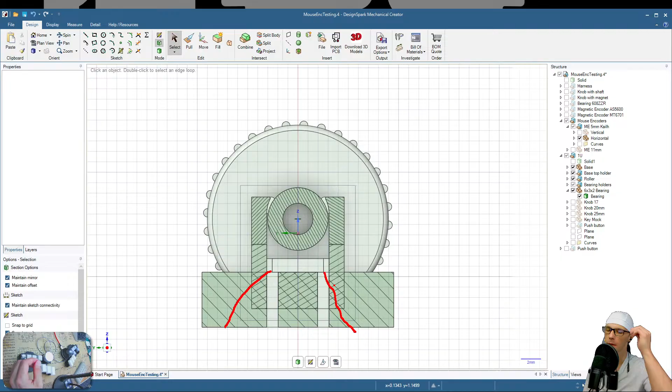The issue was that it was a little bit difficult to push the wire through, and after the stream I was thinking about that, and decided - what is the point of having it like that? Wouldn't it be just better if we just go straight down from the switch without any canals, without any fancy angles that will make moving the wire difficult?

So I just did that. I removed those canals that we did on the stream, and I just put these two. So as you can see, it's straight down, and our push button sits exactly over here. I can show you later on the workbench that it sits perfectly - we can just attach the wire and it will go straight down. Absolutely perfect.

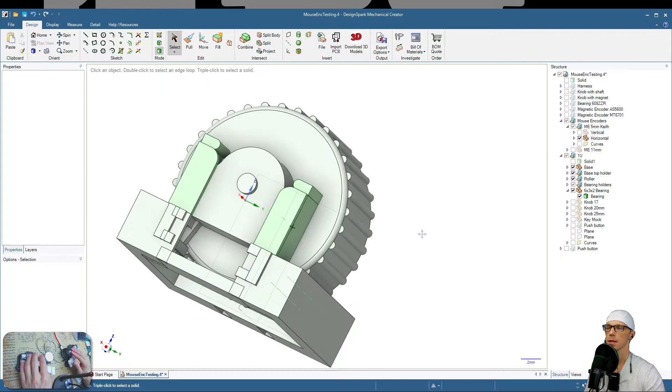Another thing that I did - I was thinking about this side. I noticed that there was maybe, let me first remove this so you'll be able to see. Okay, so original design from our previous stream was something like this. There was nothing to limit the movement over here.

It wasn't that much of an issue actually, but I noticed that it's kind of easy to move it up and down. Even by accident, you can just touch the wheel up or something, and it might happen you will just pull it out.

So at first I tried doing something - okay, I think I already removed this part. But I did like a harness over here, something like this, with an opening for this shaft, because this is where the shaft comes from the encoder, since we are using it in reverse. So I was hoping that this would hold it, and it wasn't that great. I didn't quite like it, and it was causing the whole thing to be just a little bit crooked.

So I scrapped that, and I went back to something that we had designed previously, but at a smaller scale. Don't bother with the size of the encoder, it's not fully up to scale, but you can trust me that it fits. I can show you in a second.

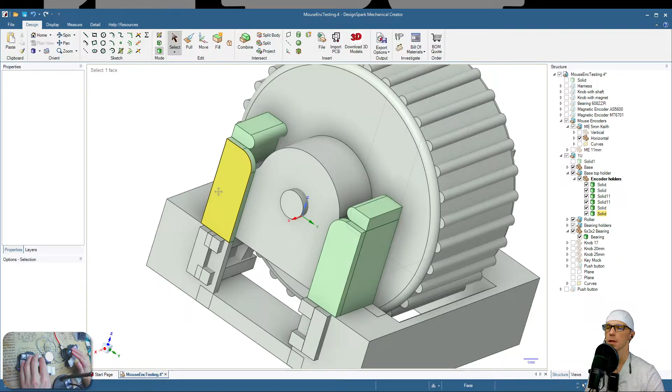So I have this to hold it, and it's pretty okay, pretty good. On top of that, I had to do some more tweaking with the wheel to have it perfectly in the center and to not scratch any part of the harness, or the mount for the scroll wheel. So yeah, I did just that.

So this is what we have now. As you can see, we have these tiny holders over here, and they hold quite okay. It's kind of difficult to pull it out, but at the same time, it's not that difficult to push it in. So that is okay.

I noticed that if there is an issue while mounting it, the only thing you need to do is move the bearing a little to the left or to the right on the metal pin, and then everything is fine. So yeah, we have a nice scroll - nothing is scratching, it's moving quite easily, and on top of that, we have our push button.

Yeah, we have a nice click. I wish the button was a little softer, but looks like we don't really have much choice here. I was hoping I would be able to use a mouse push button, but sadly it's the same shape as this one. It is softer indeed, but it's the same shape, and we can't have that - it's taking too much space. So we have to go with this. I guess it will be fine. Shouldn't be an issue.

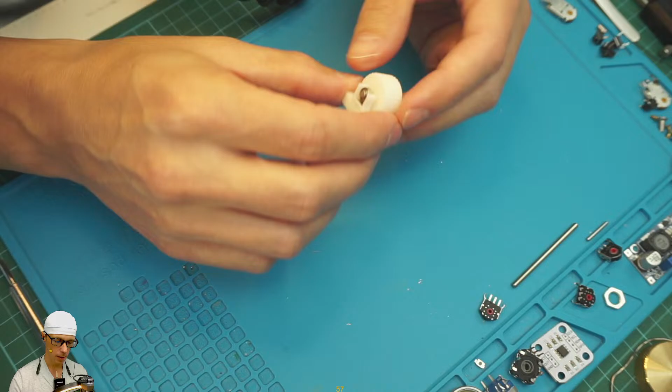It's not that we can't press it - it's quite okay, very tactile, needs some more force. Taking into account all those things, I think we're done with it. I don't think we need to tweak anything else on the encoder or the whole scroll wheel anymore. It seems fine, it's not loose anywhere, it holds pretty firmly. So I think that will be it.

So today, what we need to do is check how it fits with some other parts of my keyboards. So over here, we have our experimental Chordie. I think we can reuse this part and try to fit it in and see how it works. I also have one more keyboard prototype that's like 30% done. I'll be working on it, but far into the future after we finish Chordie - looking at the speed of progress we're having, that might be next year.

Anyway, I'd like to take a look how it behaves once it's put in a key plate, like when you have it next to some other keys. So we'll design a part of the top plate for my other keyboard. I have two of these over there.

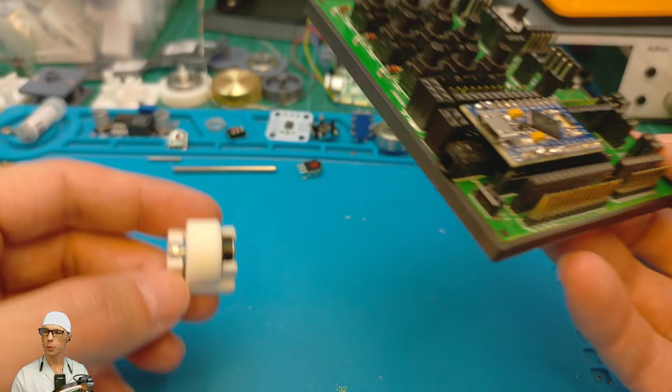Also, I hope we'll have time - maybe once we're done with CAD, we send something to print. What we can do is use our prototyping board, one of these. We already have firmware for a simple keyboard that supports an encoder. We can just add a push button and try to solder something.

Okay, I just noticed that most probably we need to fix this part because there isn't much access to the encoder pins. I forgot about it completely. Well, that's a quick fix, so we can send it to the printer very fast.

And I think you'll be able to see the pads from the push button, so hopefully the wire will be very easy to push through. Let's take a look.

Yeah, this one is okay, but I think I'd recommend something like this - a copper wire used for making jewelry. This one is too big. This one is 0.5, although it should still fit anyway.

This one would be good because we don't really have these two parts touching. These are two separate canals, so we don't need anything that's isolated, and this wire will do perfect. It'll be very easy to solder anything at the bottom - once we have it sticking out from here, we can easily attach some other wire and connect it to whatever you want.

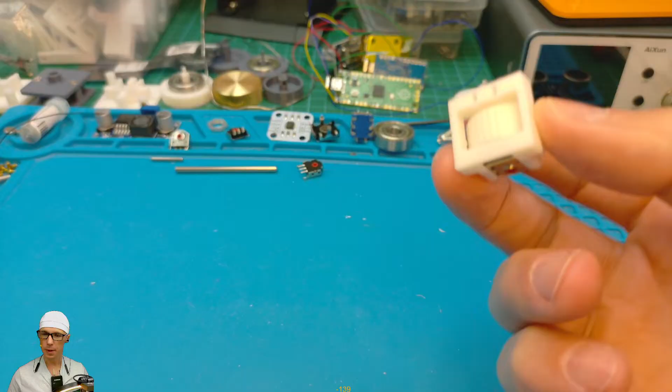Okay, so I guess that's the plan for today - see how far we can go with it. First thing first, we need to fix the bug so we have good access to the encoder pins. After that we'll be working on this. We already have a base, so that should be a quick fix as well. Okay, let's get to it.

So maybe we'll be able to finish this Chordie this year. Okay, let's start with removing parts that we don't really need over here. This bearing is also not really necessary for us, and what we want to do is focus on the bottom.

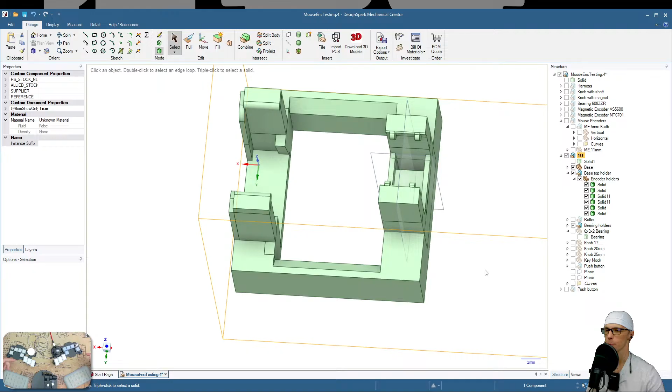Today is Friday - today is Chordie day, so as you can see, I'm working on Chordie. Just in case anyone was wondering, can you really use this keyboard? Yes, it is fully functional. It's actually great, and the learning curve isn't really that steep - you can be up and running in like 2 days, at least that's how long it took me. So I hope when I'm finished, this keyboard might find maybe some more users than just myself.

Okay, so what we have over here, we have to make it a little bit smaller. Maybe we should do it. Let's do offset from here. If we do 2.4... okay, that is half. Maybe 2.2 - okay, that would be like half, more or less.

Okay, we can find the center - center is over here. So if we move from here to the center, okay, 205. Let's leave it at that, let's make it 205.

And I think if we just project these, then we'll be able to probably just pull it down. Not like this - okay, we have this, and okay, yeah, that's what I wanted to do. That is perfect. I think we can also remove these. Okay, something is missing over here. Okay, can we fill this?

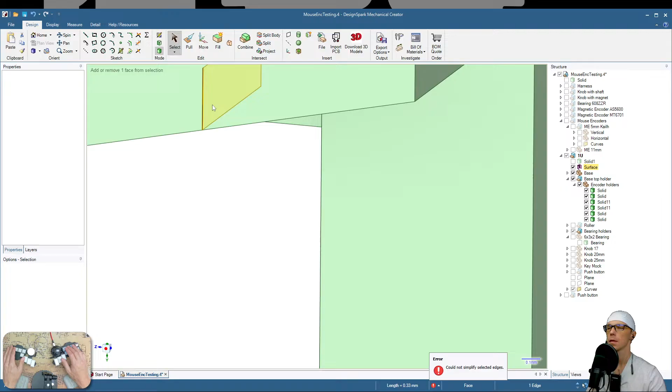Okay, there is a surface over there. Can we pull it somewhere? Can I just remove this? No, I can't. Okay, I don't really know where did it come from. Maybe if I just move everything. Okay, this is where it was hiding. Okay, so let's move this.

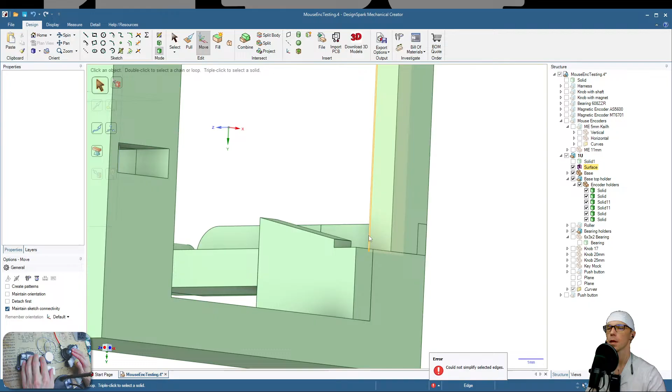Let's move this all the way to here. And this part. And this part to here. Okay, I assume it is more or less okay. Maybe we can... what's that? Can we move this? Maybe not. Let's just leave it how it is. So I hope that will be enough to hold everything in place.

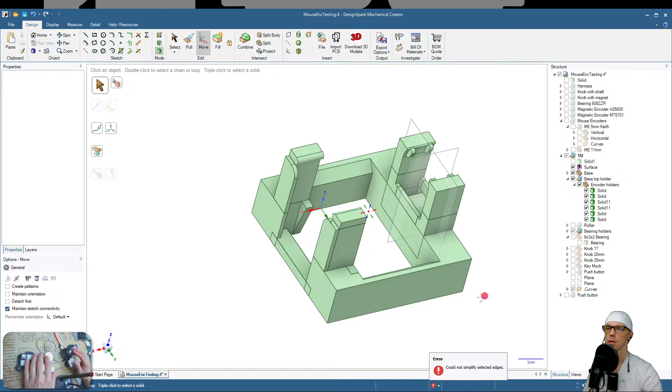Because if we completely remove this part, when we press everything, it might come loose, so we don't want that. And I think 2 millimeters should be enough to hold everything in place. So looks about right, in my opinion.

Okay, let's do a save, and let's print this little fella out. Okay, and our Bambu Studio.

Alrighty, so this is our print. Yeah, okay, that is the correct one. Any settings to change? I don't think so. Just a quick check if we have all the parts. Yep, looks correct. Okay, let's go with the print.

I hope the print bed is clean. Okay.

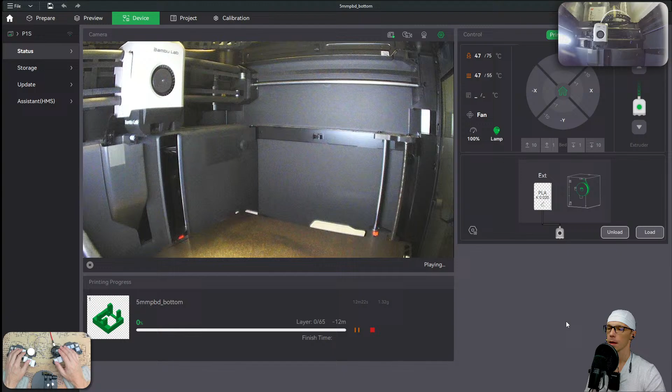Good, so back to our CAD. So this is our assembly. So maybe we can take a look at our Chordie right now.

So we have this part over here. Well, actually we have two. We have MX and we have a Choc. Let's take a look, so this is our Choc over here, and this is our MX. So we should be able to check both of them, and I think we only need to make one part and then we can just swap it between these two.

This project is a little bit messy. Okay, let's skip the volume for now.

Yeah, I can't wait to test Chordie with these extra mouse buttons. So instead of having them here, I will have it over here. So that would be cool. I hope it will be okay to use.

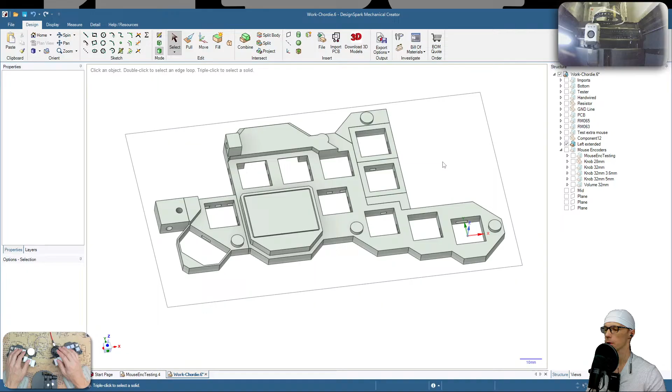And it's gonna be fun to assemble Chordie. It's gonna take a while, a couple of hours probably.

Alrighty, so what are we looking for? We would like to bring our keys back.

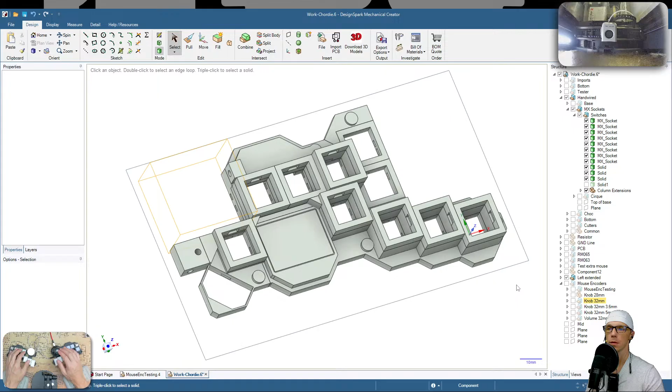Okay, so this is our MX sockets. Okay, these are the extensions, and this is our encoder over here. Okay, so this is our keyboard, more or less, how it's gonna look like, and we also have some key mockups over here. Yeah, these are kind of the most important ones.

All right, so let's take a look at the bottom. Okay, this is not the bottom that I would like to have because we have one that was sliced into pieces and that we can use.

Okay, that is a lot of stuff over here. Slowly losing track. Okay, looks like I have more sockets over here. Okay, so let's leave it like that.

Okay, and this is our encoder testing part. So yeah, we have quite a lot of these from our previous streams. A few of them were kind of promising, but honestly, I don't think anything comes close to what we have now. It's smaller, it's easier to rotate.

Okay, but I guess we would need to use this part. Or maybe more like this part. And okay, so over here, I will just make a new component and I will call it mouse and encoder, like so.

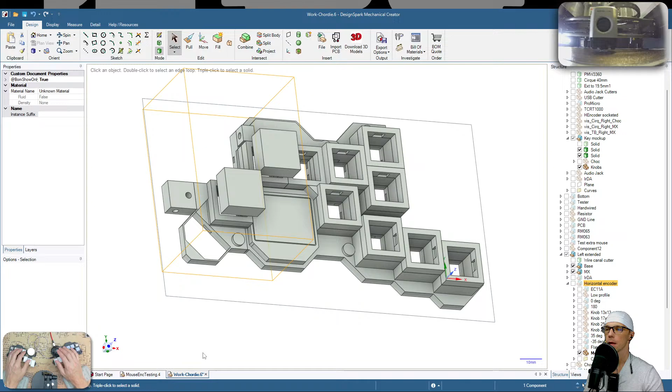And we can just copy from here and paste over here.

Okay, yeah, it looks kind of tiny compared to the other ones. Let's check what is the size. So I think we managed to, okay, 1885, so we are kind of smaller than a typical key. But on this side, I think we are 1905. Yeah, correct, 1905. So the question now is, I think I will just rotate it, maybe like this.

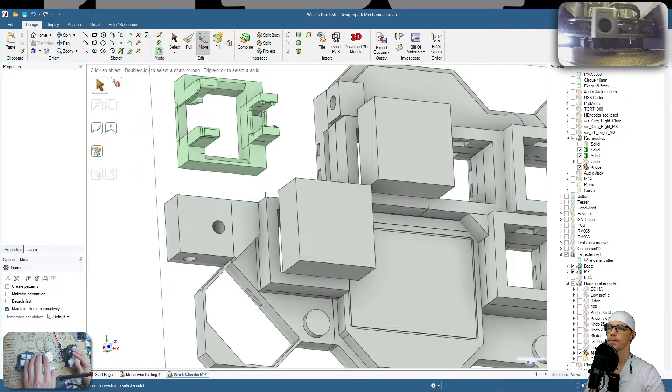Okay. I think I should bring the wheel as well, the roller.

Oh, we have a surface. We don't need the surface over here. Okay, let's make it, let's make our roller over here. And this one we can call maybe housing.

Okay, and I will just move everything except for the roller, like this, into the housing. Okay, so let's move our roller where it belongs.

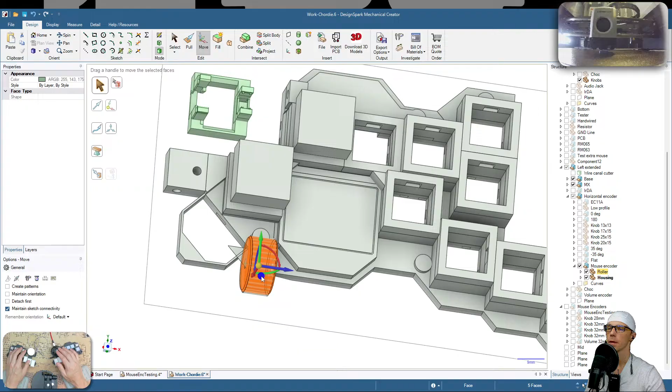Okay, I forgot to grab the whole wheel. Let's make it one more try, like this. And I would like it to align to the center point of this part.

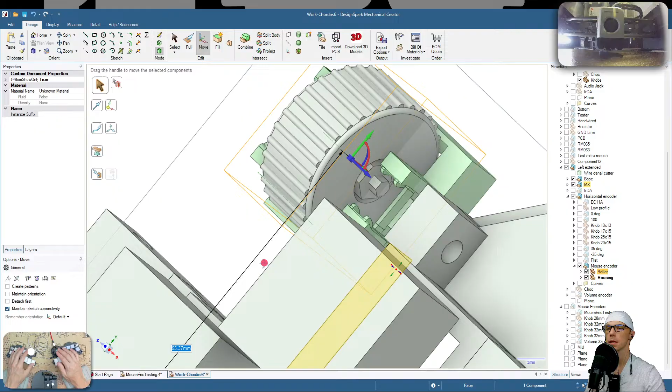Okay, I think I need to check how high it was, because I think I lost it. Do I have a circle over here to align? Okay, I think I have. So maybe we can try to... I think this is the...

We need to move the roller. Okay, I think I should be able to grab... there's a tiny cross over here. So I assume this is the center of the circle that we used. Okay, looks about right.

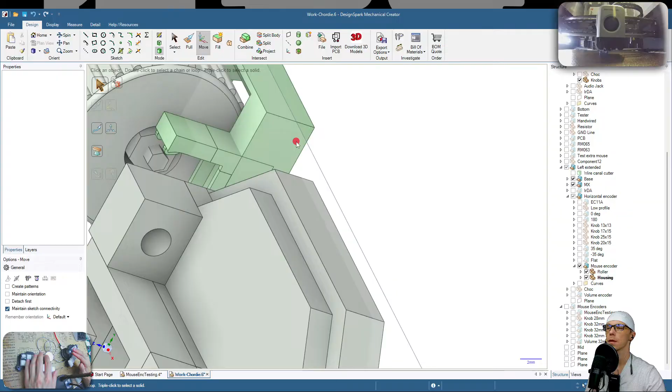Okay, so we are at 1905 over here. I think I would like to make it on the bottom. Okay, so this is... it was 1885.

Should I expand it or should I just leave it like that? I think it would be easier if we have it on a proper dimension. How to make it fast?

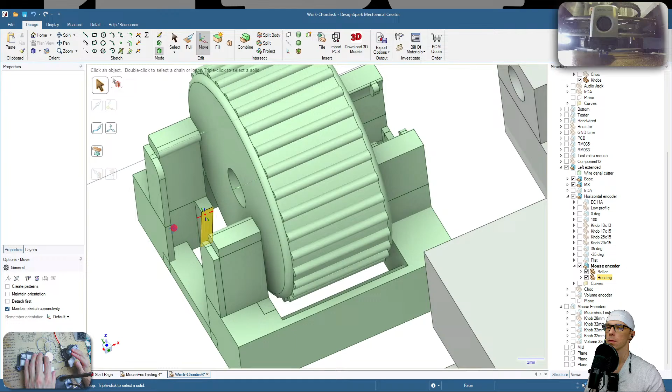Let's take a look. Okay, if I extend these walls, I don't really want to do that, and I don't really want to extend over here. So I think I will do it like this.

I think I can make something like a rectangle, maybe from the center over here. I would like to snap to the grid.

Okay, and we can make it 19.05 and 19.05. Okay, I don't know why it's 1905 by 1905. I don't know why.

One more time. When I don't want it to snap, it will snap. Okay, 1905 by 1905. And I think I will just make these construction lines.

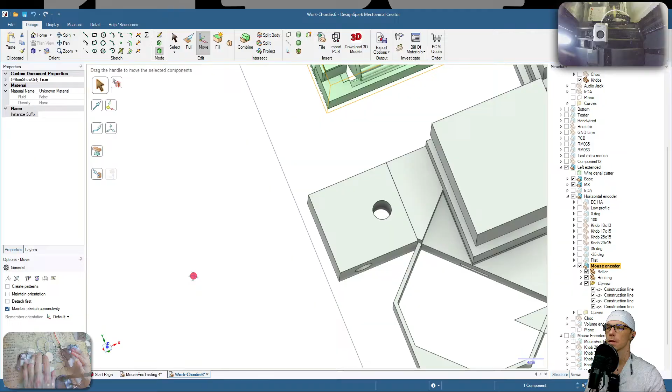Okay, so now when I grab it, this moving around is so annoying when it's zoomed in. Because if I do it like over here somewhere, yeah, it's completely going crazy. So it has to be like part of the body.

Okay, that is not quite the center. Maybe if I fill it.

Good morning, Duong Hoang. I hope I didn't butcher your name. How are you doing today?

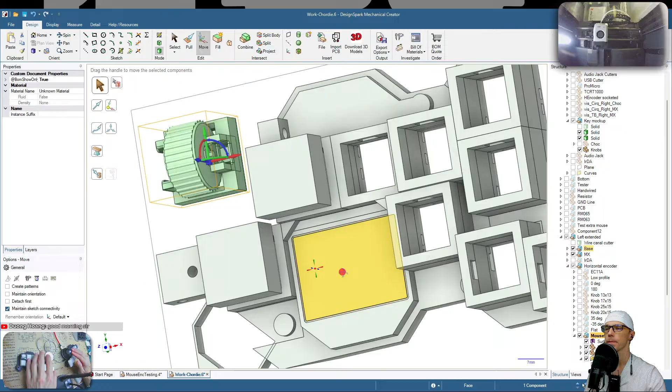Okay, let's try moving it right now. If I anchor at... okay, now we have a center over here. That is perfect, but we don't really need a center, we need to be at the edge. Okay, let's do it like this.

From here to here. God damn it, this scroll. Okay, I want to move it to here and over here. No, it's a keyboard. You can see it working over here.

I'm just working on an improved version of it. So this what I'm using right now on the bottom left corner, and you can see from the top, is actually the same keyboard that is on the screen, but the one on the screen we are making some upgrades to, so I can finally close this project because it's been haunting me for way too long.

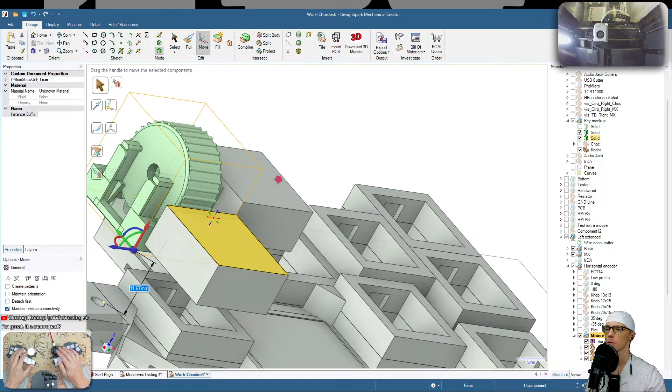And just today we finished making this encoder, which is supposed to be a substitute for one that is super expensive right now. So what I'm trying to do right now, I would like to test it. How does it work when I put it on my keyboard? Like, is it okay to scroll? Would I hit any other keys or anything like that? So that is what I'm trying to do right now.

Yeah, so looking from this side, okay, it's not that bad. Maybe it's too high a little. Okay, one more try, let's see.

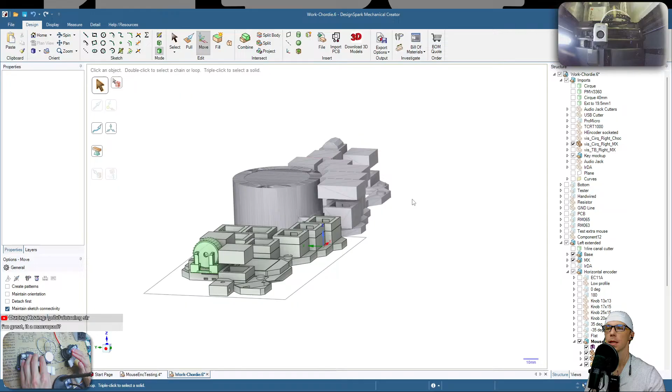Okay, now I'm totally eyeballing it. But I think we have an import somewhere that comes together with the old encoder. Let's take a look. Yeah, indeed, so this is the old one.

Okay, so it was kind of quite tall. So we can see this is the top of the key cap, and this is our roller from the old one. Okay, so it's not that bad. Let's take a look from this side.

So I think we can move it a little bit up. Okay, I don't have the keys enabled over here, so I can't really see what is happening. Where is our key mockup? I think I just closed it. Yeah, over here. So definitely we need to lift it up a little.

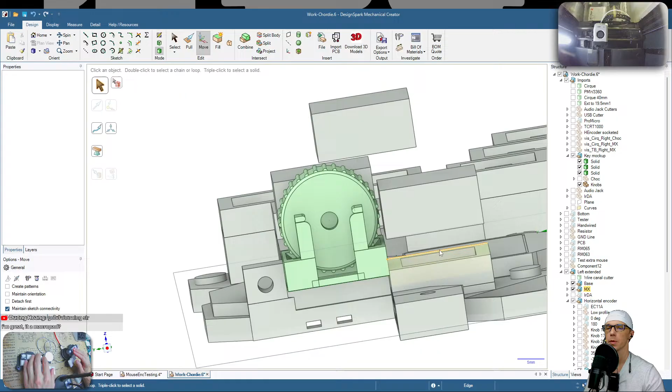And I am a little bit worried about the wheel and this key, that might not be great. But at the same time, the keycap is not really that big, it's a little bit smaller, so maybe we can get away with it. Maybe it will fit just right.

Okay, let's take a look from here. So definitely we need to move it maybe a little bit like this. So this is like 1, 2, 3, 4, four wheels, I don't know how to call this. Okay, this should be okay.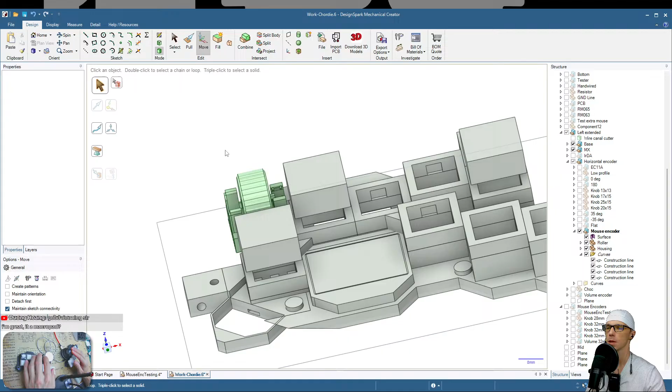Okay, I think the print has finished already. I'm not gonna pick it up right now because I think we can skip it, since we're gonna have a different part anyway soon. Okay, but anyways, let's take a look.

There were supposed to be some bottom mounts that we can use. Okay, what is that? We don't want that. Oh no, we want this part. We want this part, okay, so that's the base. There should be like a bottom plate, so we can just do our, okay, maybe over here.

I have made a terrible mess in this project, so many different versions everywhere. I think it needs some cleanup. I will clean it up, I promise, once we settle on the encoder. Then we can have everything in one file with only the parts that matter, because this is all experimentation so far.

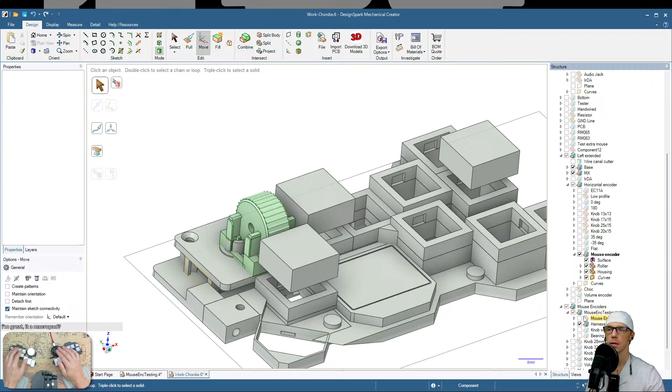Okay, but this bottom part kind of vanished. Okay, here it is, but this is a different part. I think I have... okay, that's not the one as well. Okay, base, bottom. Okay, too much stuff right now.

Oh yes, I think I found it finally, so this is our bottom. Okay, so we are over here. I think I will make a new component, I think I will just keep everything in one place. So let's have our bottom over here and let's see if we can steal anything from here.

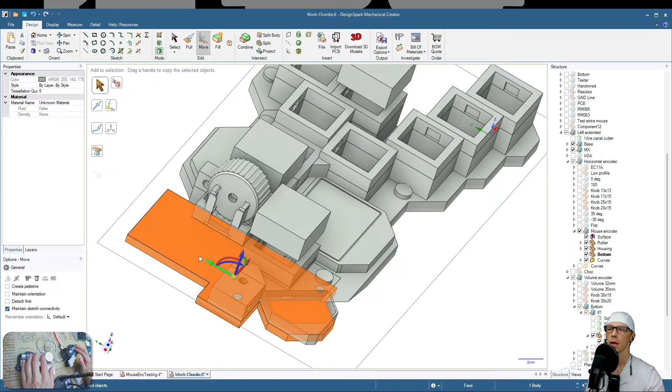Okay, this part we don't need, we have it done. And this one as well, and this one as well. We need something else, we need this part. Yes, okay, let's just copy and paste. All right, that looks good.

Okay, so how are we supposed to mount it? Okay, I think I'm gonna mount it from the bottom. Do I have this part even? Okay, I think, okay, we will do it like this.

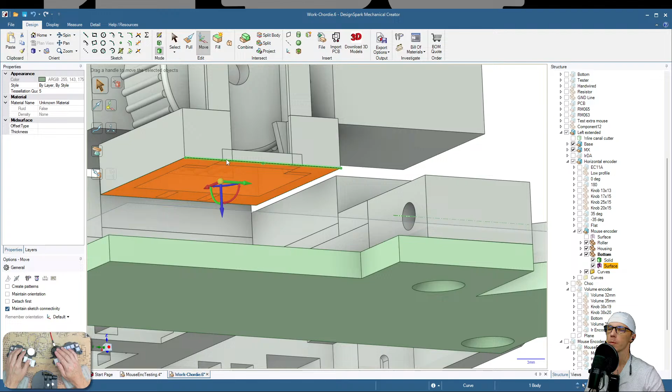Let's make, okay, this surface, I don't want to really touch it, but I would like to copy it. Okay, so from this, we can pull it down all the way to here, so that will give us our height for the encoder. And okay, as I always say on this channel, one screw is enough. So I hope if we can just use one screw over here, it will hold everything.

Okay, and I think we need to make some kind of opening. This we can skip because I don't think we'll be wiring anything right now. So I will just go ahead, but we definitely need to open this part because there will be pins sticking out from the encoder. So maybe if I can just project everything, that maybe will be fast and easy, or I will just break everything and we get a completely messed up surface.

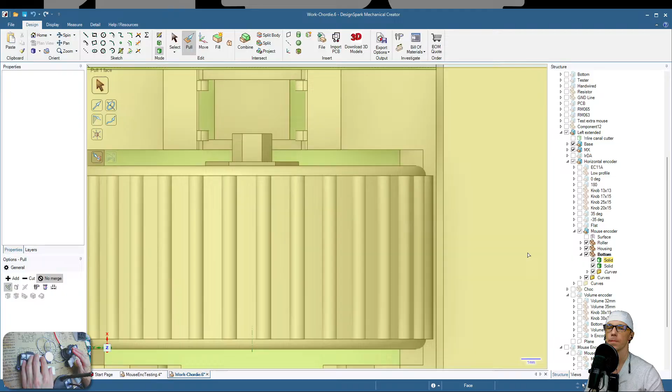See how it goes. Okay, I think it would be faster if I just did a line. Some fancy artifacts, okay, let's see what we have over here. If I hide the roller, can I pull it down? Okay, yeah, okay, that wasn't that bad.

Okay, we can save some time on print if we move this part over here and maybe this part over here. Okay, is it gonna still hold? Yeah, it should be fine. Okay, let's make this one smaller as well. Okay, so we have two screws over here that should give us a good hold for it.

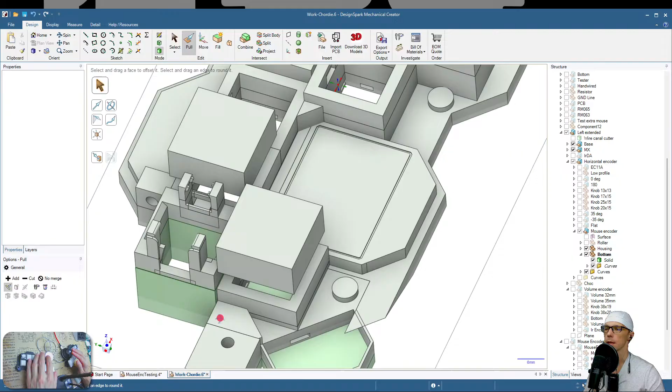Let's see the whole thing. I really wouldn't want to rush it too much because knowing my luck, I'm gonna overlook something and we're gonna waste time waiting on the print to finish just to realize that something is off, like a millimeter, and we can't really use it.

Okay, what else do we have over here? Just to be sure, so okay, we have the mounting holes. We have our encoder over here. Alrighty, I think we should be good. We have all the parts for the encoder, for the mount.

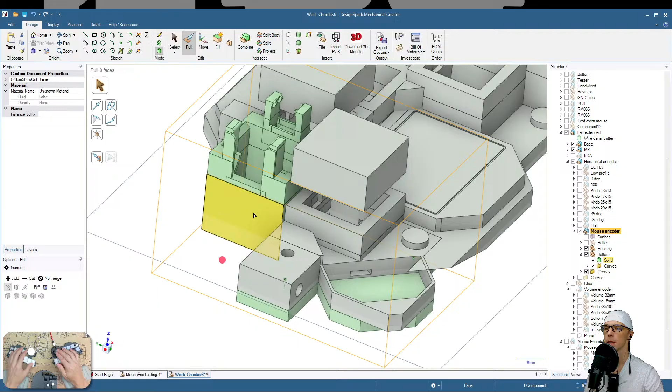Okay, this one's a little bit bigger, but that is fine, we don't have to worry about that. Okay, and if you take a look at the roller, it looks about right, should be good. I am very curious about this part, about this spacing. I have a feeling that it's not gonna be good. What do we see about that, especially, okay, maybe you can get away because this one is lower. Okay, anyways.

Okay, I think we have everything for this one. Yes, my keyboard. This is my keyboard, yes.

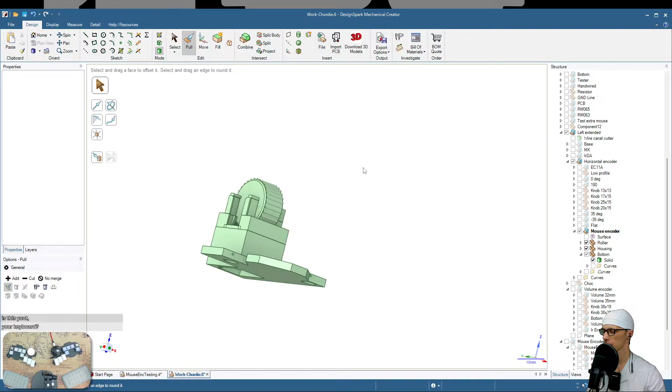Okay, I think I can send it to print. I hope we didn't miss anything. Yeah, okay, it looks good. One way or another, let's just print and see what happens.

Okay, I forgot it's a different project right now. Okay, how do we call it? Let's make a good name for it because we have so many STL files. Let's make it mouse encoder. Oh, that's a nice standard. Mouse encoder 5 millimeters, horizontal. Okay, whatever, looks good, looks good to me. Okay, new project.

Yeah, new project, and where can I find this? I think it should be in my keyboards project. Yeah. Chordie. And there it is, yay. Okay.

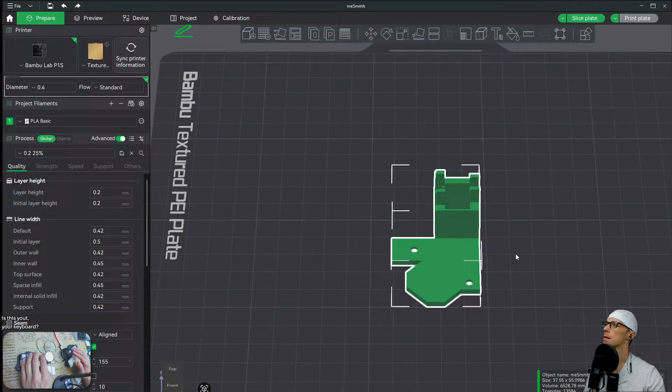It looks fine to me, some minor things that we don't really have to worry about right now. Okay, let's slice it. I think I need to pick up the other one from the print bed because I think it's sitting right there waiting to be picked up. Yep, okay, I will be right back.

Okay, I think we can proceed with our print. And in the meantime, I think we can take a look at the Choc version. Okay, let's have a peek at the printer. What is happening over there?

Alrighty, so this is our MX version. Okay, let's take a look. So there's too much stuff over here. This one is empty, so I think I will just remove this part. Okay, this is our base. Okay, this is MX, so we don't want that.

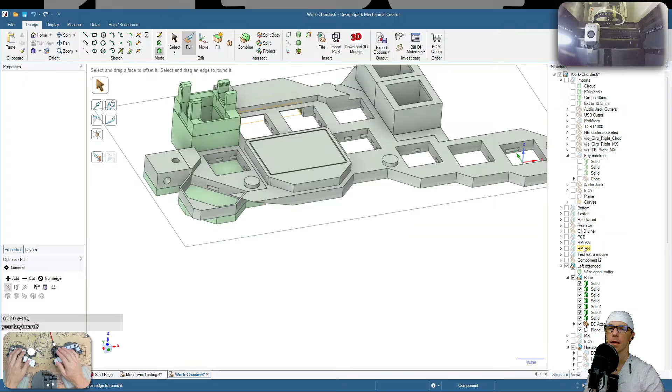Okay, this is our Choc. But this is our extension, and where is the rest of the Choc? Most probably it's somewhere over here, where we just import. Oh, this really needs some cleanup. Can't find anything in this project anymore, especially now when we spent like 2 weeks on the encoders, or maybe even more.

And I see that there is infrared part missing over here. I mean, we won't be printing that anyway, so maybe I shouldn't worry about that. Yeah, okay, it doesn't really matter. Where do I find our Choc keys for this one?

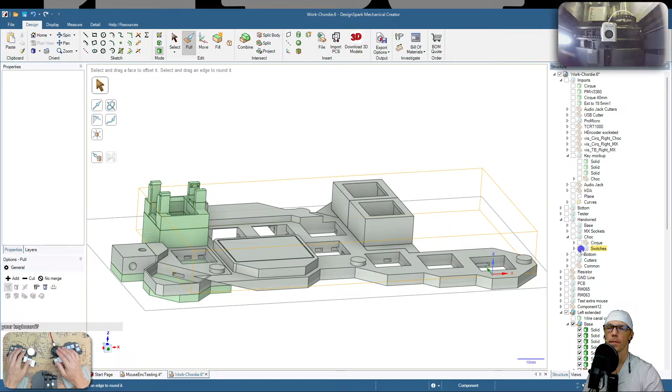Okay, I think that's it. I think that's it. Yep. Looks about right, but something is not quite right because... Okay, we have two thumb clusters. This one is... I think this one is flatter and this one is higher.

Okay, at this point it doesn't really matter which one, because that part is not really important. We won't be printing it. We would like to focus on this part over here, this key and this key. So...

Let's go back to our encoder. How is the print going? Okay, hasn't even started yet.

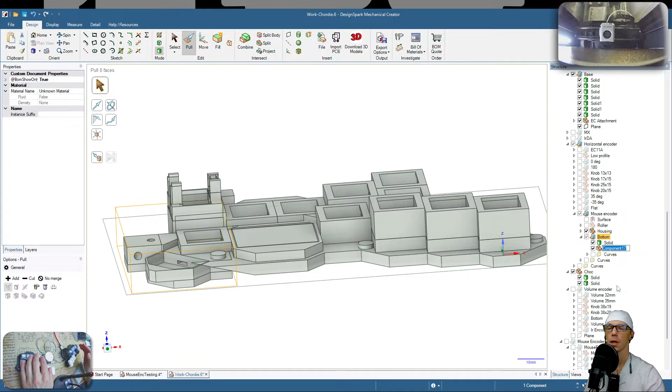So I think this bottom part, I think I should split this into two. So this one will be MX. Let's just move it over here. And this one will be Choc. And what we can do, I think I will just take this one. Okay, we have the whole part. Oh, okay, that's fine. And I will just paste it over here.

Okay, that's a lot of noise from the printer. And looking at it, I think we have to do the same thing for the encoder as well, because you have like two versions, MX and Choc. We have two different heights, since it's one part, so we have to split this as well.

This is our housing, so let's make it... this one is for MX. And we make a new one for the Choc. And just like before, I will just copy everything.

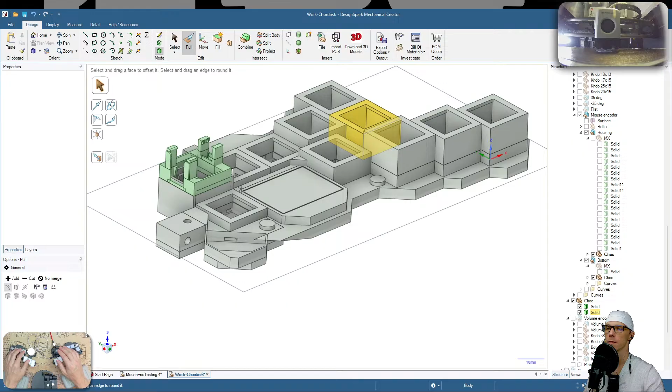Okay, I think we can just keep copying the roller wheel. I think I can just move it. On the other hand, it's gonna be difficult to align it every time. So yeah, let's just copy the wheel as well.

Okay, so housing, and now the roller. Okay, like so. And okay, where is our roller now? Okay, we have it over here. I will just move it to here.

This one is empty, so we can get rid of that. And okay, this is our MX. So we have everything done. Okay, and now let's just copy from here. Activate the Choc. Okay, we need a new component. That will be our new roller. Okay, and this is our new housing.

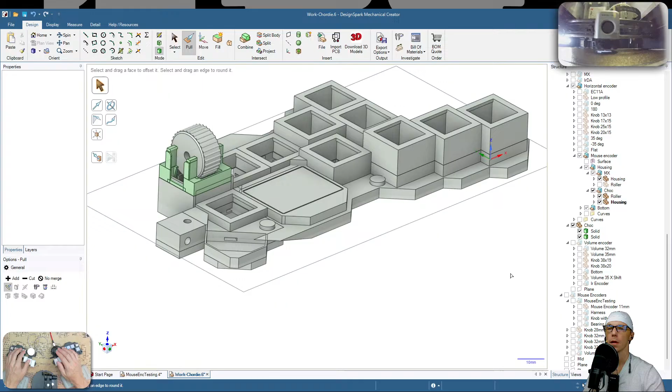And let's just move everything where it belongs. Okay, so MX we want to hide, we don't want to do anything with it. And now we're gonna work on our Choc. And maybe I should also move the bottom parts. That will be maybe even better, since we have all of that. Yeah, that I think that makes more sense.

Like this, and over here we also make bottom, and we can move this part. Okay, and this is not really needed anymore. Yeah, a little bit of cleanup might come a long way later on. All right, so let's take a look how the keys are oriented for the Choc.

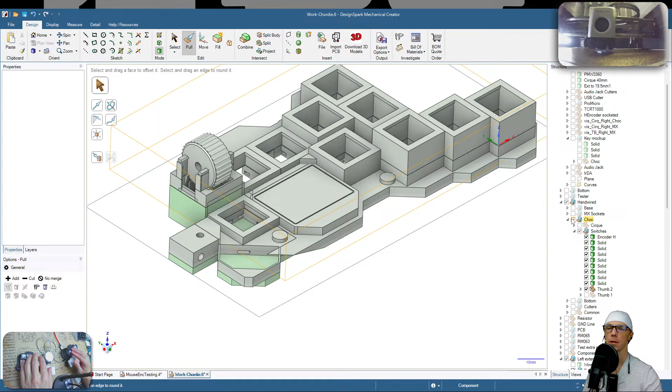Okay, so this is a little bit too high. So if you want to move it, let's take a look from here maybe, or maybe from the other side. Okay, like this.

Okay, we don't want to do it with the bottom. We want only these two parts, roller and housing. Okay, one more time. Okay, so we want it to be something like this. Okay.

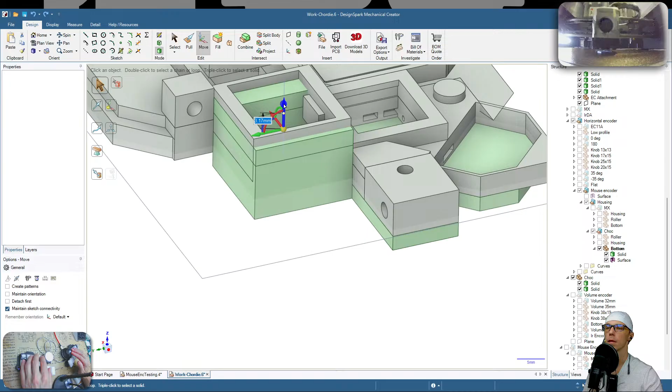Not quite sure what have I done right now. Okay, what is this part right now?

Okay, we can pull it down. So moving wasn't the best thing to do, and we also have this part which we don't want because this is the mount for our old encoder. Okay, can I hide it like that? Yeah, I can hide without going into the tree. Okay.

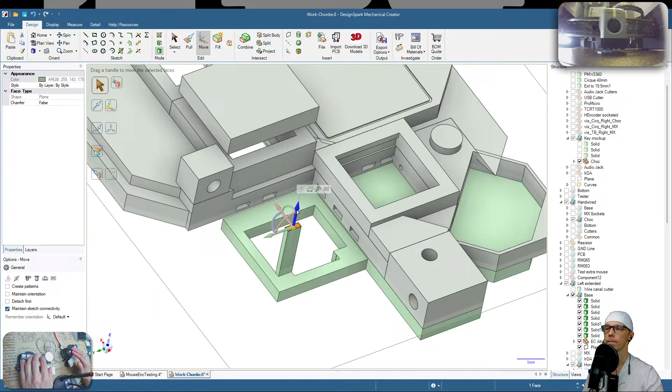Can I fill this part? Okay, I can fill this part. So we have just one solid like that. And okay, let's take a look at our housing.

Okay, so it's a bit higher than that. So now we can move it all the way up to here. Yeah, it's a little bit too close over here to my liking. We can always make the roller smaller a little bit.

Because right now, what is the size of this fella? Okay, 8.5, that's the radius, so it's like 16, 17 millimeters. That is not that big as well, but I think it's bigger than the original one.

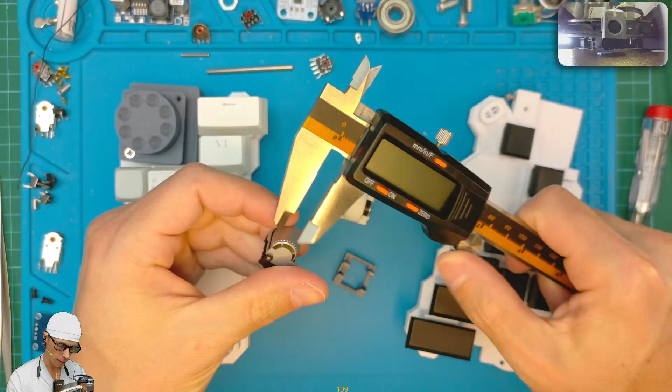So that's the original one. And how long is the... how big is it, more or less? Okay, that one is smaller. That one is just 12 millimeters, more or less.

And how long is it? Okay, 12 by 12. We are a little bit thinner. We are just 9. We can't go any more than that. But yeah, we are almost 18, 19, almost 18 and a half. Yeah, but at the same time, we can't really make it much smaller than that because we're gonna start.

It will be difficult to rotate because if it's too small, we'll start touching the mount for the encoder, which is not great. Okay, we're gonna find out soon if it fits or not.

Luckily, I have all those prototypes for testing. So what we need to do is just screw it in and that will be it.

Okay, how is the print going? 8 minutes left. Oh, we are quite fast.

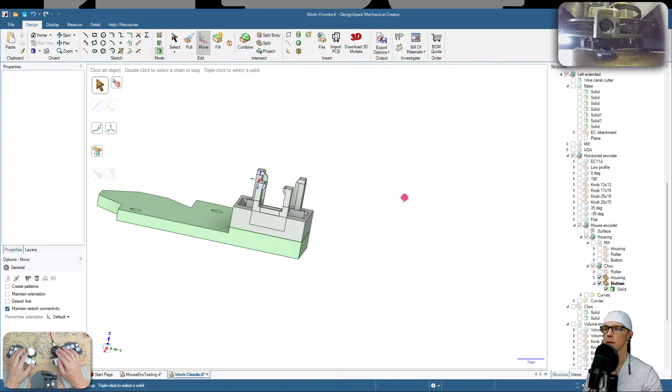Let's remove the roller. Okay, so this is our part for the Choc, which is a little bit lower. Okay, let's do a quick save. Okay, I think we can close this one.

And let's change the name. Let's make it Choc. I should have named the other one MX, but okay, I hope I will remember that the one without any extension is MX, and this one is just Choc.

Okay, looks okay. Yeah, most probably I will only find out if it's okay or not once we have the whole keyboard built. Okay, should be good.

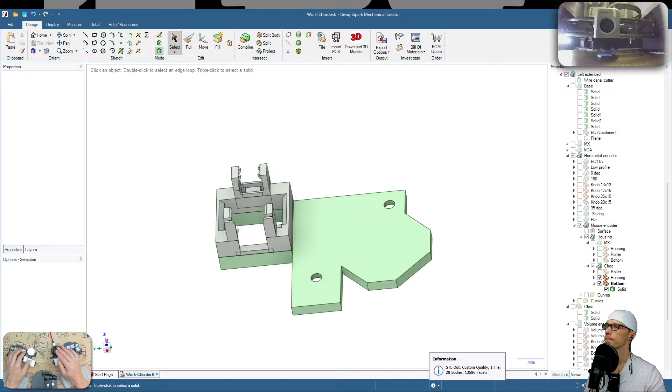Okay, we can start a new project and we can add our Choc version. And what do we have over here? Okay, 1 second.

Okay, it's the left side. For a moment I thought I need to make a mirror, but yeah, it's mirror is only on the right side, so we didn't waste like 15 minutes printing the other one.

Okay, so we can keep it like that. Yeah, should be good.

All right, so I think what we need to do, just wait for a while for this one to finish. We have 6 minutes left.

We have this one done as well. We have Choc finished. So I will be playing with this with MX. The Choc will be printing.

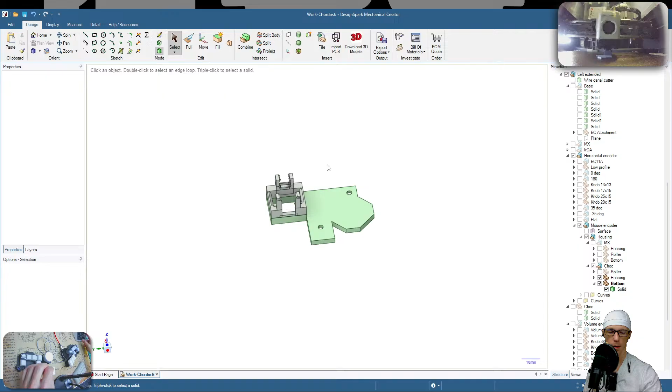Okay, I think I need to find the bottom pieces. Okay, let's put this one aside. And okay, I just printed that, and I don't think it will be really needed.

And it's getting more and more crowded over here, just like the project, so I won't be able to find anything. Like half of the stuff is not really necessary. Okay, so I have to remove this part.

Okay, I will take the screw with me. Yeah, I hope.

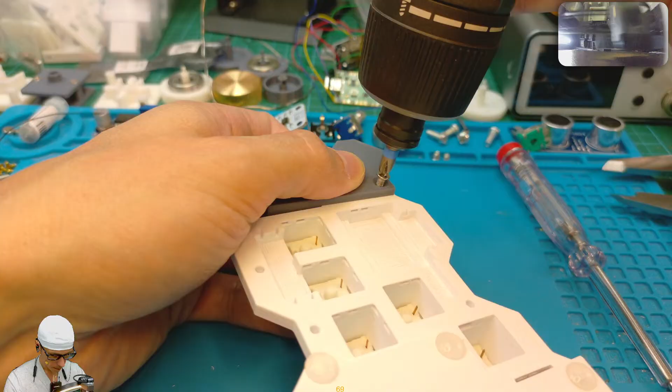As I said, one screw is enough, yeah it should be good. What is happening? Why is this pin falling out right now? It was okay all this time. Maybe we need a longer one. The question is, do we have a longer one? Do we have one, if it's possible.

Yeah, we can always push it in, maybe. It looks like it's fully seated.

Okay, so let's take a look. Okay, looks like it's fine. We can scroll. Okay, what is happening right now? Suddenly the roller started behaving, and the metal pin - so difficult to remove right now.

Okay, so we have something over here. So the one that we've been using right now, let's take it out and let's take a look.

Okay, this one is very short, no wonder it doesn't really hold that well. How about we take this one? Seems like it's the next one. Okay, what is the length of this fella?

Is it really longer? Yeah, just a tiny bit, it might be exactly what we need. I can't really grab it, it's so tiny. Yeah, but it looks like it's longer.

Okay, let's remove the bearing first. Oh, this is gonna be tricky, because it holds so well. But most probably it would be very difficult to get it out, and I don't really want to destroy the bearing at the same time.

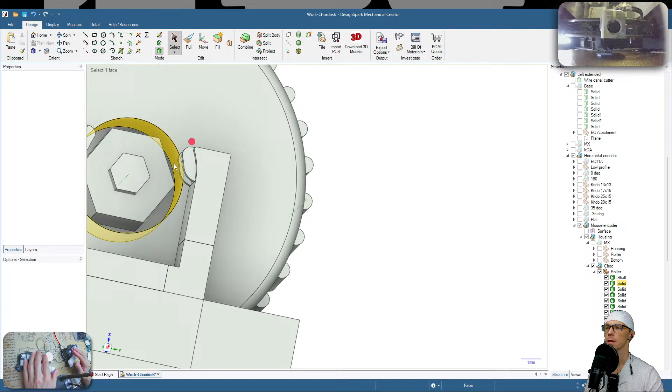But I think we can move this part. Okay, we have this tiny thing over here, so let's move it. Okay, I think I would like it to be, take the ruler, so let's make it maybe 4 millimeters from here.

And now I have so many rollers that most probably I won't be able to tell which one is what. Yeah, but as long as I print the one correct one, that should be good.

Just one more check. How does it look on the... Okay, should be good.

Well, actually, okay, let's make it a little bit more. Let's move it from here. Again, from here, I want to move it. And the ruler, and let's make it, okay, now let's make it 2.4.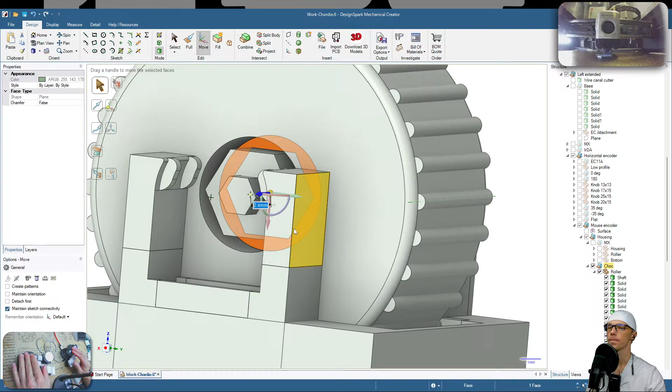So now there should be better connection over here. So if you look at the slice, yeah, so this part now is bigger, so this should give more stability.

I also mentioned last stream, I also got smaller pins. Maybe I got one M1 and M1.5. I really hope we can fit one of them into the encoder. That would be perfect, having metal pins on both ends.

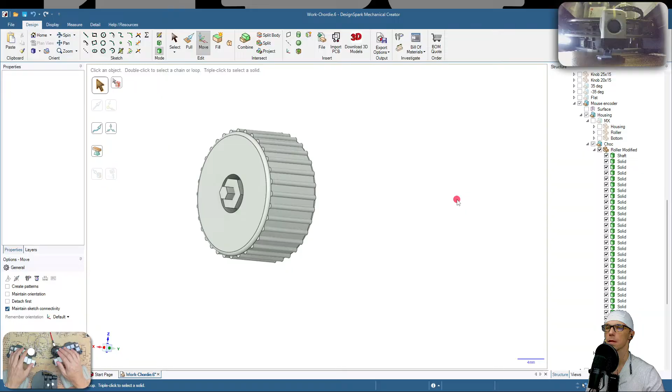Okay, let's change this name. Let's make it modified, so I will note that this one is a little bit different than the rest. Yeah, okay. Let's make it roller modified.

Okay, so this will be our next print. I hope it won't take too long, because we're kind of stuck. And the longer pin won't fit in anyway.

How is the print going? Let's take a look. Okay, it's finishing. I think it's done already. Okay, I will just go and pick it up. Is it really done? Yes, it's done. Okay, I'll be right back.

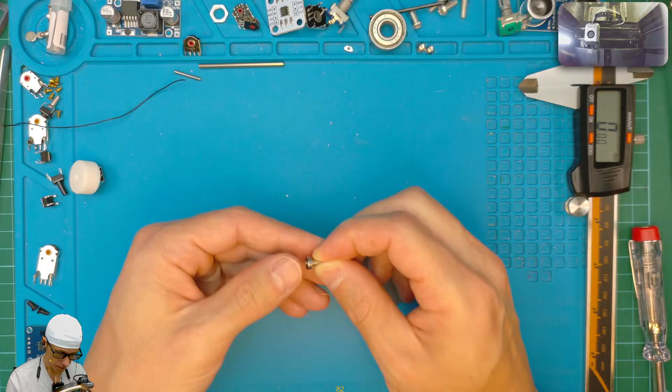Okay, so anyways, we are still stuck because we don't have the wheel anymore. Let's just put the bearing on. This might come in handy. I have to push it.

Okay, still not sitting in. Something is not quite right. It's too tight. It should be moving a little.

Let's try to push it out. Okay, it won't go either way. Can't push it in, can't push it out. Yeah, these metal pins with those bearings, it's always a pain.

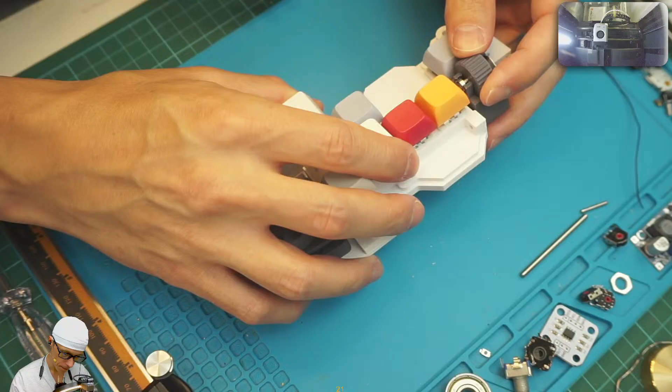Okay, it's not that bad. Looks like spacing is okay. Kind of, no, not really. Yeah, I think it has to be pressed a little bit more. And I think I broke the back. Yep, this part is gone.

Too bad. Okay, so we have this one. So this is our Choc. Okay, so let's fix it. Maybe first, looks like there's not enough support.

So we just broke our MX. Okay, we broke this part. Okay, can we make it one body?

Okay, so... okay, now it's one body. And what we can do...

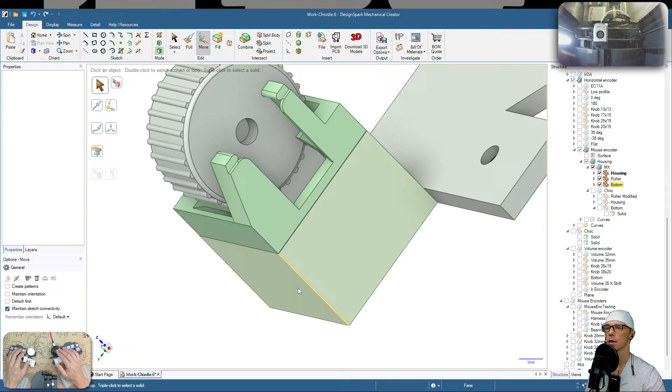Okay, maybe can we move this edge to here? Is that gonna work? It looks quite chunky. Maybe it will be enough not to break, but at the same time, would it be also possible to force it inside, because there might be too much force. Okay, we're gonna find out soon.

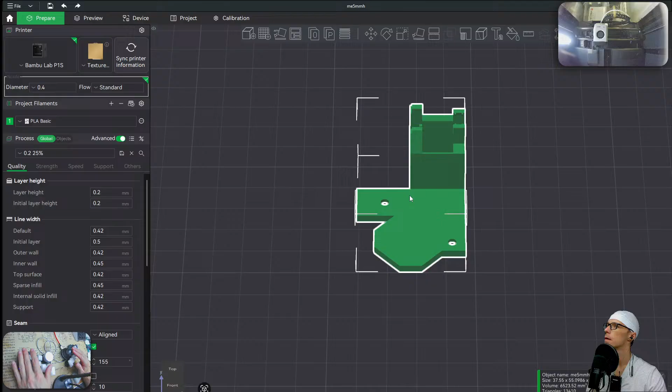Let's print this. Okay, should be fine.

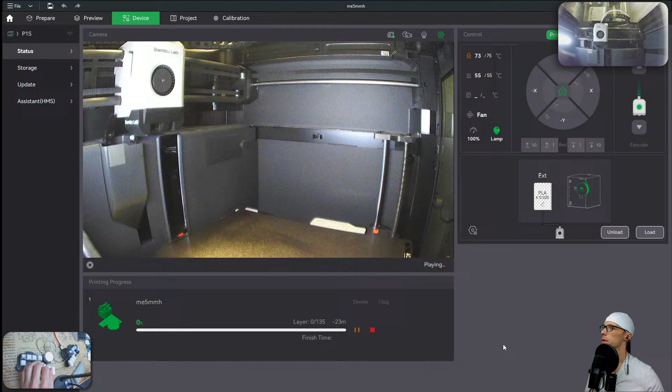All right, so it's gonna print. It's gonna take a while, but in the meantime, we still have Choc that we didn't break yet. Okay, so MX aside, and the Choc version over here.

Maybe first I will just put in the push button. Screwdriver is better for that. Okay, it sits in.

So now is the part. I hope I won't break it. Yeah, but also looking at it, I think we have to press the bearing a little bit more. How can we do that? It doesn't want to move at all.

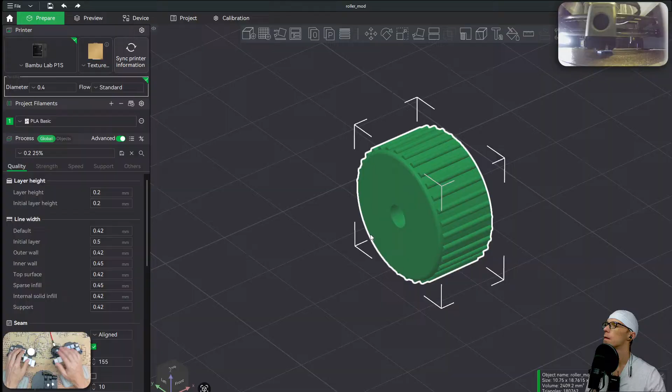Yeah, having a second printer would be a blessing, so we can print two things at the same time. But on the other hand, I don't really have much space left for anything else at my place, so wishful thinking. That would speed up the prototyping as well, because I don't have to wait for one part to finish.